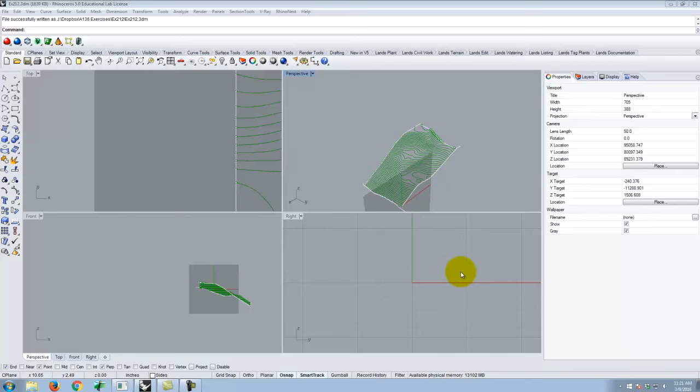Let's see here. I'm going to go to File, Geolocation. Actually, before I do that, I'm going to get rid of this person. And then I'll go to File, Geolocation, Add Location. I picked Tahoe last time. I don't know, we'll do Tahoe again. Why not? No, let's do Hawaii. Yosemite. All right, let's make this a little bit bigger so I can see a little bit more.

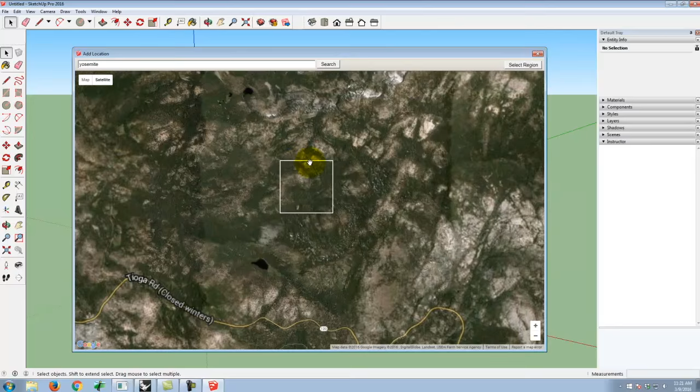We're going to avoid things like this, which are never going to really turn out nice. Let's see here. Yeah, we'll try this region, see what it looks like. I'm going to go to File, Geolocation, Show Terrain. It's a reasonable piece of terrain, not too steep. Sure, why not, we'll go with it. Yeah, let's find something a little steeper.

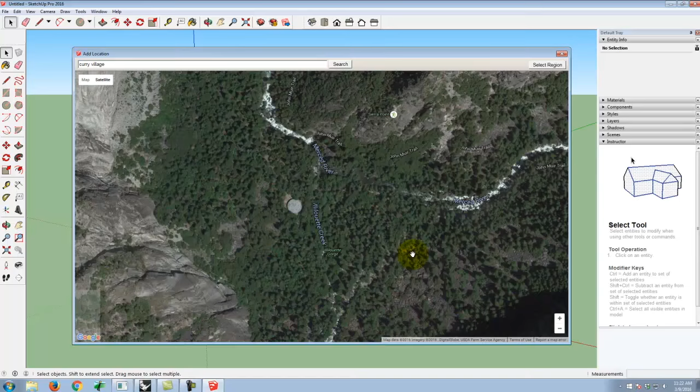Yeah, go to Curry Village. Very good. Is that in Yosemite? Yeah, that's in Yosemite. We'll pick something like in about this region. So I have to avoid all of those really steep hills, right? We can't do Half Dome, that's a bad idea. Yeah, maybe it's something like this. We'll try that.

So geolocation, show terrain, let's have a look. Okay, it's reasonable, this side I feel good about. That maybe is doable, it's a little on the steep side, but I'll go with it for right now.

Okay, so I'm going to go back to File, Save As, and make sure I pick a SketchUp 2013 or earlier file. That's what Rhino can see. And I will call this Yosemite, and I'll save it on my flash drive into today's folder.

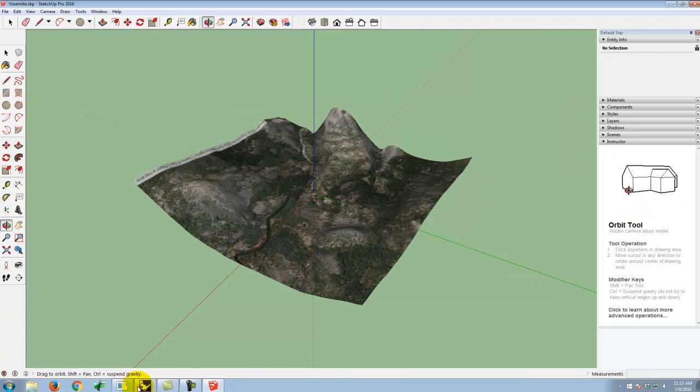Perfect, so now I have that, and I can close SketchUp and start working in Rhino. I have my file from last class already open, so I'll just open a brand new Rhino window. We'll go New, Large Object, Inches as my template. Remember, it needs to be in inches in order for the terrain to come in at the correct scale.

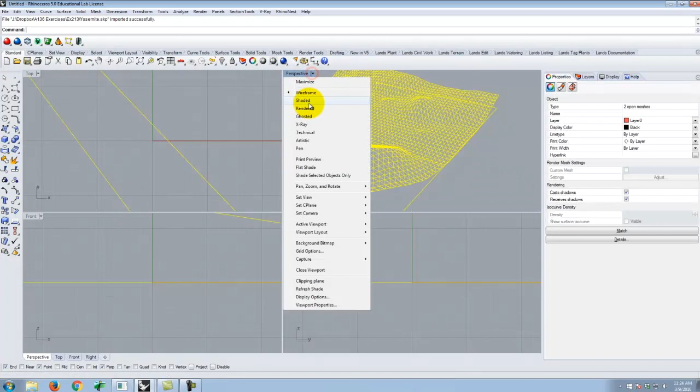Then I'll go to File, Import, and I'm going to import the Yosemite file right there. The default options here are just fine, so we'll go ahead and say OK. And if I look, there is my mesh. I'm going to go into shaded mode so we can have a better look at it.

There it is. I don't need the flat surface, so I'm going to go ahead and create a new layer. We'll call it SketchUp.

And a new sublayer, we'll call it flat plane. Now, that square was existing when I brought in the SketchUp terrain. We'll do one more for SK terrain - just trying to stay organized here. So we'll put this on this layer, and we'll put this on this layer. I could just delete it, but this way I have the ability to just turn it off.

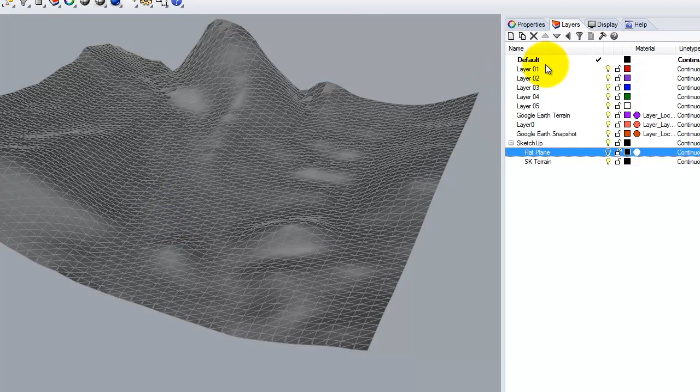OK, so there's my SketchUp mesh that came in. I need to convert it to the Nurbs object, just like I've been doing. So I'm going to do the contour in the X and the Y. We'll use a new layer called Contour X, and we'll do another layer called Contour Y.

All right, I'll start from this corner right here, making sure I'm on the Contour X layer, and I'll use the Contour command - it's also under Curve, Curve from Objects, Contour. I'm going to contour the mesh, starting with my vertex snap on in that corner, going off in space just in the X direction. And for distance, we'll try 100 feet.

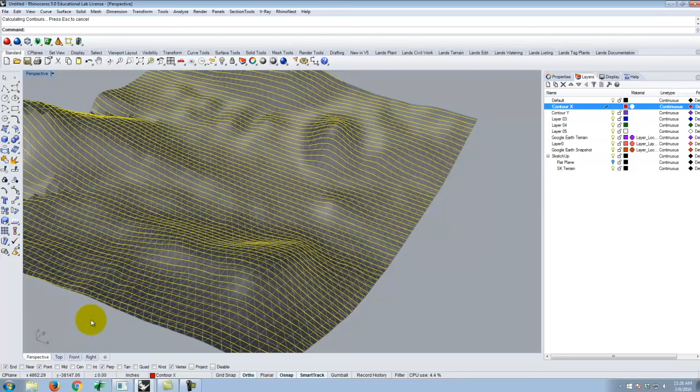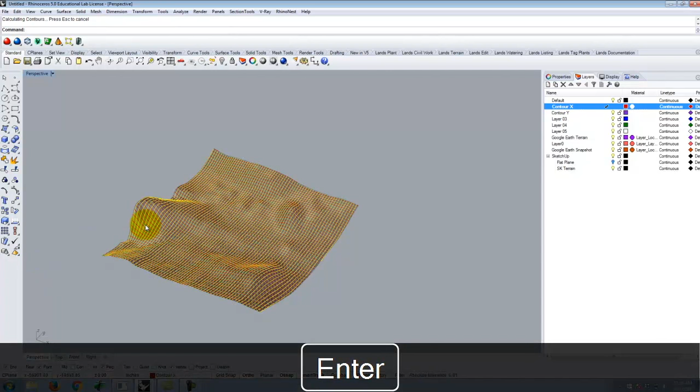Looks pretty good. Remember, I'm not going to repeat the contour with the line selected - I want to go back to the surface. So we'll repeat this now: Curve, Curve from Objects, Contour, or you can just type contour. I'm going to contour the mesh. This time it will be in the Y direction, so we'll go off here in the Y direction, and I'll go ahead and press Enter because the default value of 100 feet was still there.

So now I can turn off the SketchUp layers altogether, and I can look at my curve network in the top view. It is a grid, which is exactly what I was after. I'm going to do a little bit of trimming here. I know that I have way more than I need in terrain, so I can be rather generous with how much I'm cutting off.

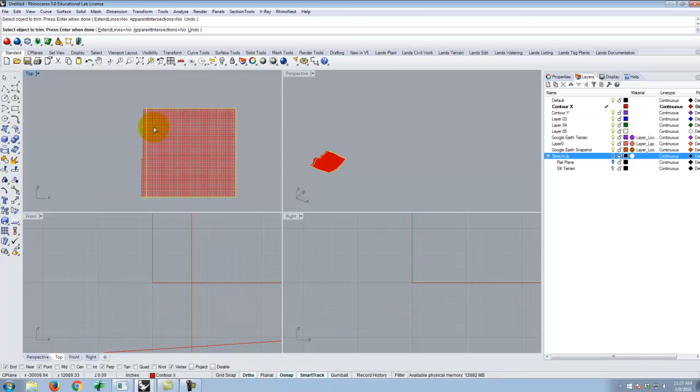And I'll do trim. Remember, if I select from the right to the left, everything that I touch will get trimmed off. That was a little too much. There we go. There we go. Always a little trickier on this edge to go from right to left. But that should do it. Perfect, so now I have my curve network.

And obviously I'm going a little faster today - this is the third repetition of this, so I feel like I have the right to go a little bit faster. So now I have the curves that are going to make up my curve network.

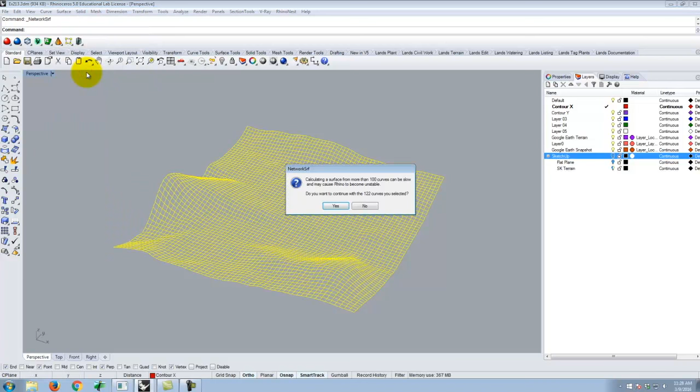And they've been established. Before I actually do the curve network, I am going to save this file, and we'll save it as exercise 213. I'll click Save, and then I'll go ahead and do the curve network of this object. So I'll select the objects, go to Surface, Curve Network. Yes, I do want to continue. This is going to take a few minutes to process here. We'll say OK.

And we'll wait - this part I can't speed up. I'll help you. I got the X and the Y down. Good.

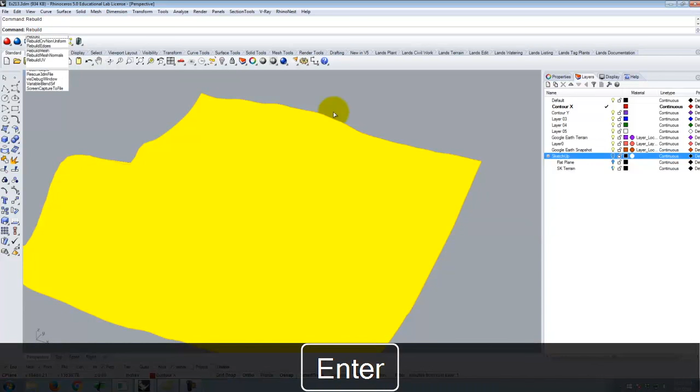Okay, so it's now finished, but the resulting surface is that super dense, slow-down-your-computer style surface. So I'm going to click and attempt to select that surface - it'll select in all yellow, that's how we know it's too dense. I'm going to type rebuild, or go up to Edit, Rebuild, and I'm going to rebuild the U and the V to be at 100 by 100. I always start at 100 by 100, and then I take a look at the resulting terrain.

And I can actually - this should have been on a different layer, sorry - change object layer. Now I can turn off the X's and Y's, and so I can have a look at how jagged this surface is. Yeah, it's still a little jagged. In this particular case, it's not too bad because of the nature of the surface itself.

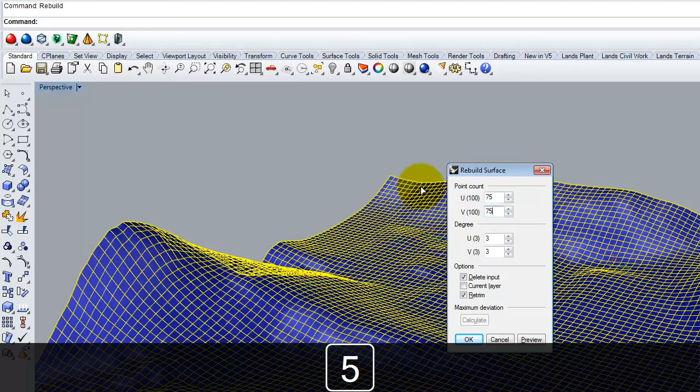But I'm going to rebuild it again at maybe 75 by 75, and again, that's a matter of your own preference - there's not a right or wrong answer for that. OK, so I've smoothed it out a little bit. Now I need to look at making this into the physical model. So I just made it through exercise 111. We can look and see.

111, 11 minutes. So we went from 40 minutes to 20 minutes last time, to 11 minutes this time. So we're speeding up, right?

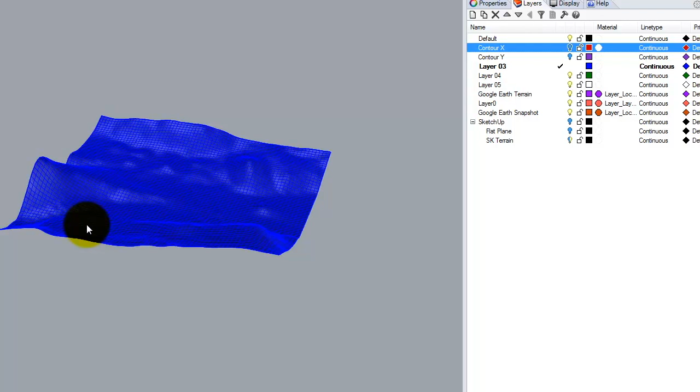Hopefully you're speeding up too. Anyway, let's continue along here and move into what we did last class as part of exercise 12. I'll slow down a bit as I do this so we can review. On the bottom of today's handout, I gave you the same chart in case you left yours behind, or you can use the one in the book as your cheat sheet.

From here, I need to establish the size of my 11 by 17 at whatever scale I'm going to build my model. In a studio context, they'd tell you to build the topo model at 1 to 200 scale or 1 to 100 scale, or some specific requirement. In this class, there isn't a specific requirement, so you can build it in any scale you want—it's up to you. Obviously, you can't pick a scale larger than the amount of surface you have.

The scale that seems to fit most people well is 1 to 200. So if I look at this sheet at 1 to 200, and come over at the 11 by 17 size at scale, that would be 3,400 feet by 2,200 feet. So I'm going to draw a rectangle at 3,400 feet, comma, 2,200 feet. And lo and behold, this seems to fit rather nicely on my site, so I'm happy.

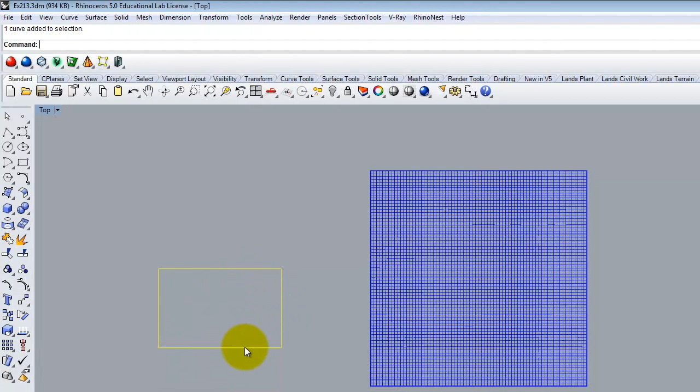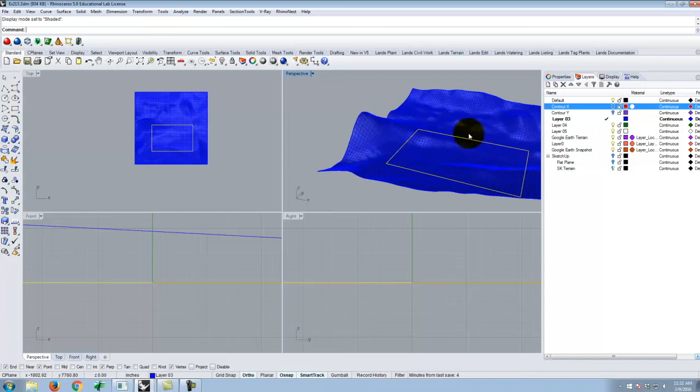At this point, I'm going to move it to line up with my site. It's a little hard to tell where it's going to show up on the particular site, so I'll switch my top view into shaded mode so I can see what I'm looking down on. I have a rather empty, vacant center of the site, but I have a few hills, so I want to make sure I include at least part of some of these hills.

Let me move it—I'm going to try to take that piece and slice through that little hill. And let's go a little further to the edge because I'll get a bit of topo on that back side. So let me move it again. I'm doing a combination of views so I can determine where this falls on the piece of topography. It's always a little hard to determine exactly where that rectangle is.

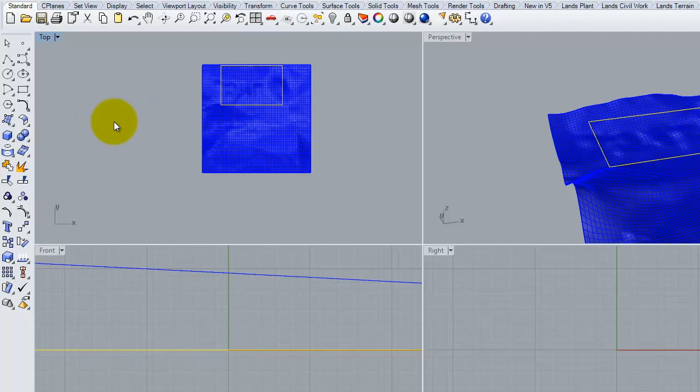But it's looking pretty good, I think I'll have good results. So I'm going to switch into the top view. Remember, to do this projection, I have to be in the top view—I can't do it in one of the side views or the perspective view. So I'm going to be in the top view with nothing selected.

I'll type project, or go to curve from objects, project. It says select curves and points to project, so I'll select that rectangle and hit enter. Then it says select surfaces or polysurfaces to project onto—there's my polysurface—and I'll hit enter again.

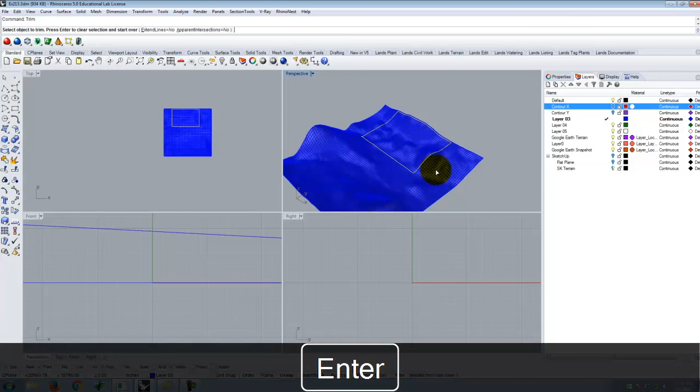So instead of having that flat rectangle from before, I now have a rectangle that represents the 11 by 17 scaled size of my piece of terrain, right there. I'll take this piece of terrain, type trim, and get rid of the outside piece of terrain, because all I'm going to be modeling is this piece of terrain.

Now that I have that little piece of terrain, it's time to start working with it at scale so I can create those jogging steps along the side of this piece of terrain. So I'm going to create contours of this surface. Maybe not—I told you this was how my day was going, right? Forewarned.

So there's my surface. I'm going to create contours in the z direction of this piece of terrain that represents my model, but I have to make sure I do it at the thickness of the material I'm going to construct the physical model out of. I told you last time that if you bought the bookstore cardboard, it's 5/32 of an inch thick. If you pick some other material, you'd have to measure it precisely for its thickness.

This same technique would work just as well if you were cutting out, say, plywood. The difference being that you wouldn't be able to cut it out with the laser cutter, you'd have to cut it by hand. But the same technique would work no matter what you're doing it with.

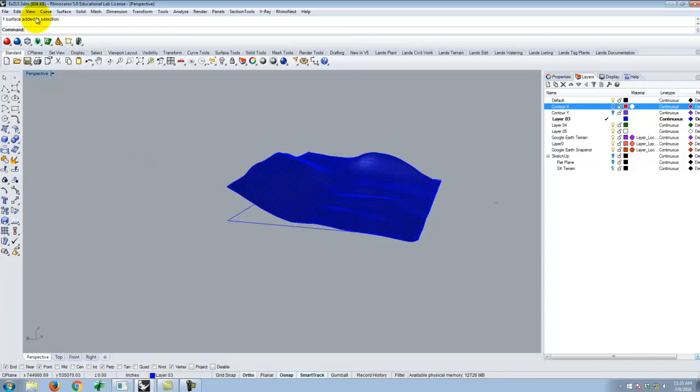So I'm going to go ahead and do my contour. I'll go up to Curve, Curve from Objects, Contour, or I can type contour. I'm going to contour this surface, and press enter when I'm done. I'm going to start it down here in the lower corner.

If I'm in the perspective view, I can only pick contours in the x and y direction. But these contours have to be in the z direction because they're stacking vertically. So I'm going to switch my view so I can see either the front or the right side. It doesn't matter whether you're working in the front or the right side, you just want to make sure you're going straight up. I can see this in all three of my views: the perspective view shows it going straight up, the front view shows it going straight up, and the right view shows it going straight up. That's what I want, and I'll go ahead and click.

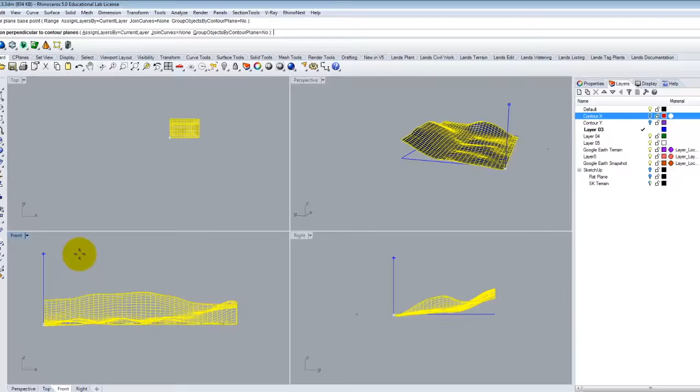At my scale, 1 to 200, I'll come over to the value for 5/32 of an inch, and it's 31.250 inches. So my distance between contours will be 31.250 inches, and I'll go ahead and hit enter.

If I look at this in perspective now, I have all of these contours that have been drawn for me. Actually, this is a pretty good one because there's some ups and some downs that we're going to have to solve, so it'll be good for the phase of what we're doing.

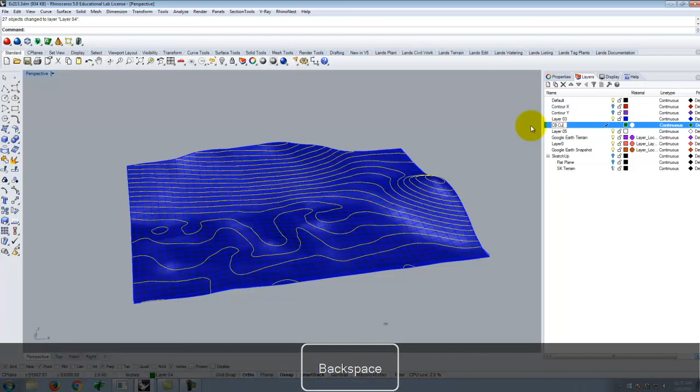Let me go ahead and change these objects onto a new layer. We'll make layer 4 here my cardboard cut, cardboard topo lines, something like that, and we'll turn off the surface itself. I do want to be able to reference the surface because I'm going to have to figure out when a particular step goes up and when a particular step goes down in this lower, flatter part of this setup here.

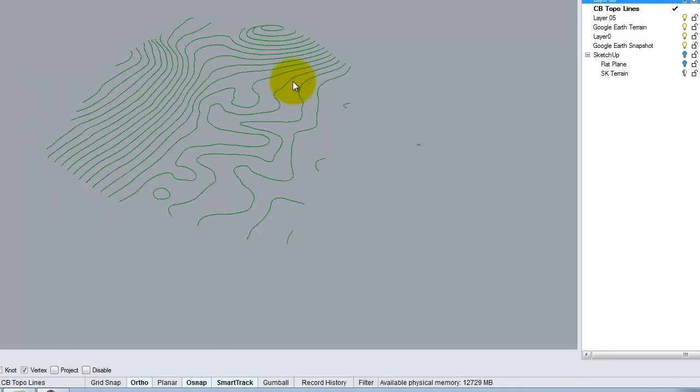So now that I have that, I'm going to start to work on the steps on the side. Like I said last class, I really like changing the C-plane and working in a different C-plane because I think that's the easiest way of dealing with it, and from a skill set long term, you'll benefit from doing it this way. So for today, I'm only going to demonstrate the C-plane method. If you feel more comfortable with the other method, by assigning the points and then rotating them, there's nothing wrong with it—you get to the same place, it's just a matter of comfort.

Right now, my C-plane is in world top, and we can see my little grid there representing my world top C-plane. I'm going to go ahead and make that grid a little bit bigger, just so you guys can see it on the screen better. I'll go to Tools, Options, select Grid, and maybe make it 2000, and go ahead and say OK.

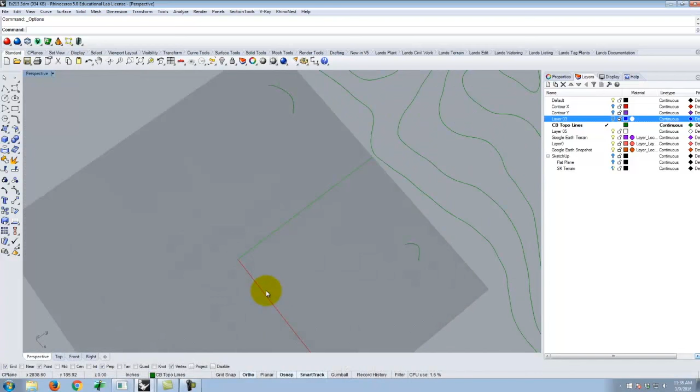So at world top, there it is, flat on the ground. I'm going to reset this C-plane so that it's going along the side here. I'll click on this little triangle, and go to Set C-plane, 3 points. I'll start by clicking on the first point, or maybe the second point, along the side of this edge, and run the X direction out along this axis—again, not snapping to anything, just straight out. I have to set the Z-axis so it's going straight up, and the only way I'm going to be able to do that is to look at all my views at once, and there it is in the front, the right, and the perspective view going straight up. So I'll go ahead and click.

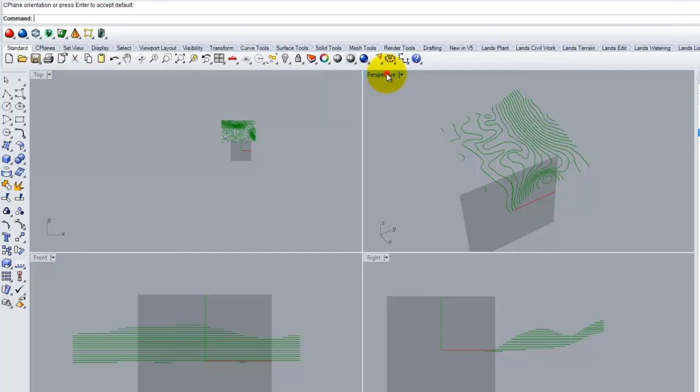Now my grid and my workspace essentially is aligned with this edge of my contours, which is exactly what I was trying to do, so that anything I draw, even if I were to draw a line over here, it's going to be in plane with this edge—I can't draw anything flat. So I've switched the drawing plane to be vertical, which is the idea. Let's go ahead and do some steps, and I'll start working on layer 5, and let's rename layer 5 to be steps.

If I can't type, what else is new?

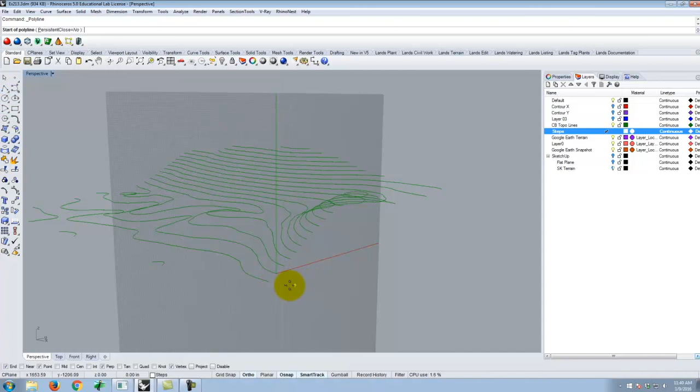Steps. So that's the current layer, and I'll go ahead and start drawing in my steps. I'll start at the lowest point here and use my snaps. I'll make sure perpendicular is on so I can use my smart tracking with perpendicular, and we'll work our way up this side.

Of my contours. Some of the technique here is in what angle you view this. So here I am, and you can see that this last contour, this circle, doesn't intersect the side that I cut. This contour here will actually come straight across and meet. If we follow this contour around, it ends up being the same level, so they should be at the same point.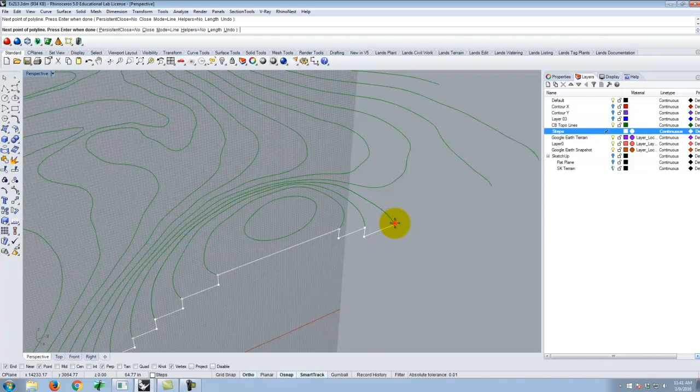And then I'll start going down in the opposite direction, like that. Now if I look here, this contour is at the same level as this contour, but I've already gone straight across here. So this particular piece actually has to go down, over, and then back up. But I know my contour interval is 31.250 feet, so I'll type in that as a value and have it go straight down.

So there it is, going straight down. I'll come straight across and then back up, and then go back up to this last point right here using my smart tracking there. I'm going to end by just extending this line off into space.

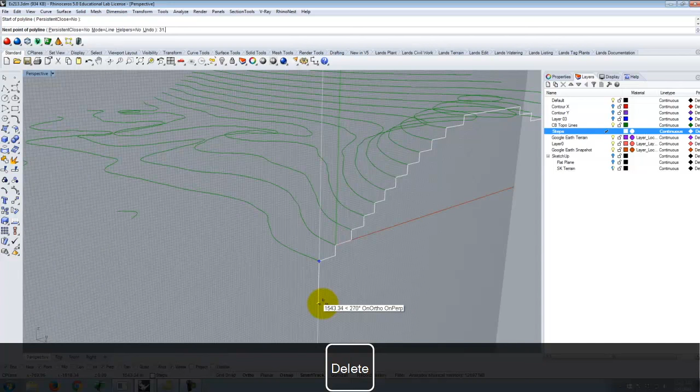So over the corner, it's possible at this front location that I also need to go down 31.250 feet. And I'll run this line off into space. Ultimately, I'm going to end up intersecting that line as we go forward.

So now it's time to move my C-plane to one of the other sides and work my way up one of those sides. I'll work my way around and start now at this point. It's much harder to reset the C-plane using 3 points here without going back to world top first. So I'll go back to set C-plane, world top, to kind of reset back to the defaults. Then I'll go to set C-plane, 3 points.

We'll snap to that point, and I'm going to go off in space this direction. Again, I have to go straight up in the Z, so I'll do that using my front and or my right view. Now, once again, that grid is shifted 90 degrees from where it was before.

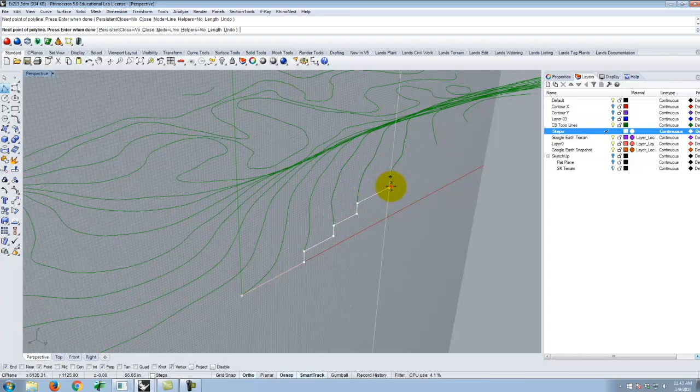So I'll start at this point and draw my way up the steps. So here I am at the top of that hill. Once again, I'll go straight across.

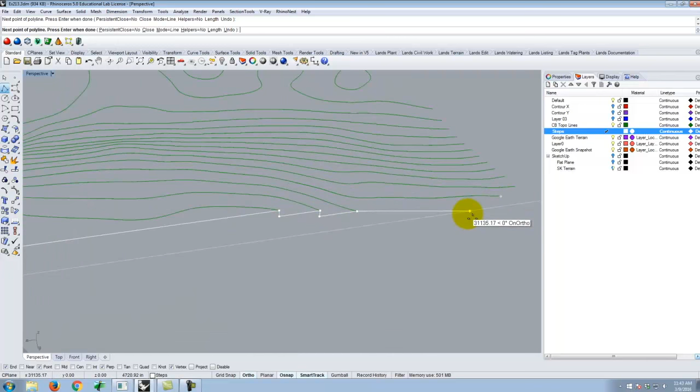Now I have to go back down to catch the next set of terrain here, so we'll go down and over, down and over. And when I get to this last point on the side, I need to go down 31.250 feet and then run it off kind of out into space there.

I'll come back to this first point and do the same thing, so it's going to go down 31.250 feet. But as I come across here, if I run this off into space like that, we can see that that corner—we didn't emphasize corners last class—but those two lines intersect at the same level, which is exactly what I want to have happen.

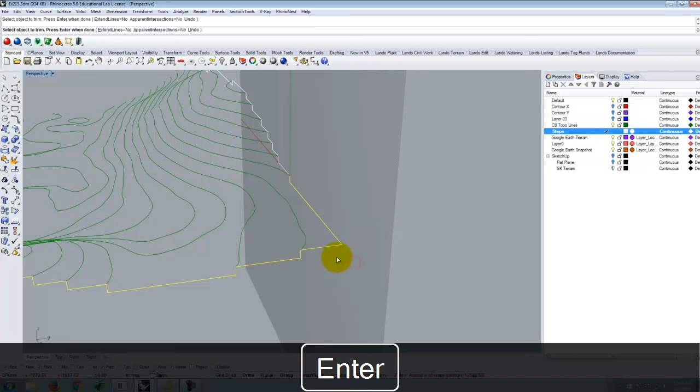So now that those two intersect, I can use a trim command and get rid of that, and they meet nicely at a point. If you try to use the trim command and it won't trim, they don't meet up at the same level, which is a problem. So we want to make sure that they end up at the same level.

So I've worked my way around that corner. Now I need to work my way down this side. So once again, I'll reset my C-plane to world top, and then I'll go back and say set C-plane, 3 points.

I'll start at the first point along this side, and we're going to go in that direction and then straight up. There it is, straight up. And I now have a C-plane at 90 degrees to where I just was. We'll work our way down this side—I'll start at this first point and start snapping my way down the side.

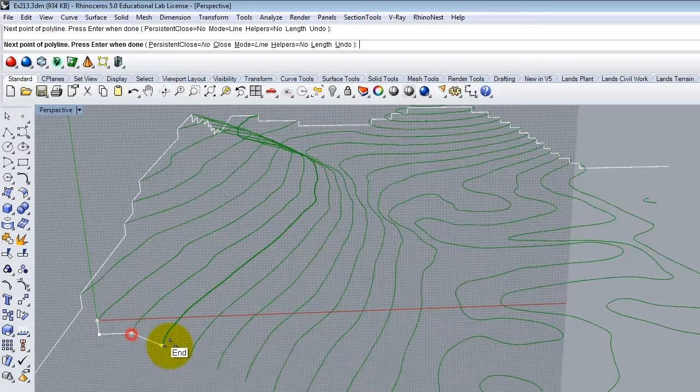The good news is this is not the most complicated piece of terrain, so you don't have to sit here and watch me do super steep steps.

Okay, so here I am, and it looks like there's a little hole here, but I'm still going to have to make my next step down. So we'll go there, and then we'll keep going. So while it might have looked like those two were on the same level, they in fact were not.

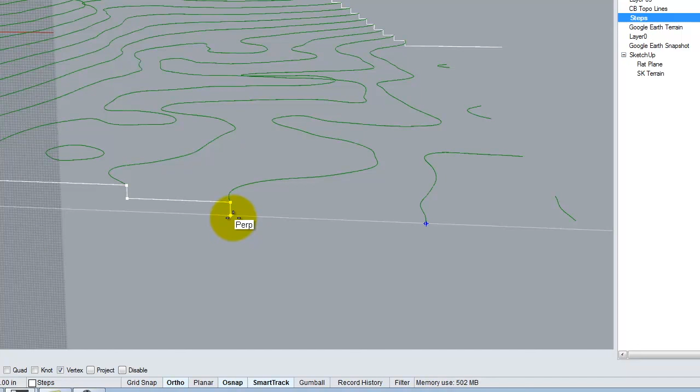And so I get to that last point. I'm going to go down 31.250 feet, and then off into space that direction. And I'll also come back to this level and go off that way. And when I do that, we can see that once again those two intersect. So it's time to do a trim, and trim off those two pieces as well.

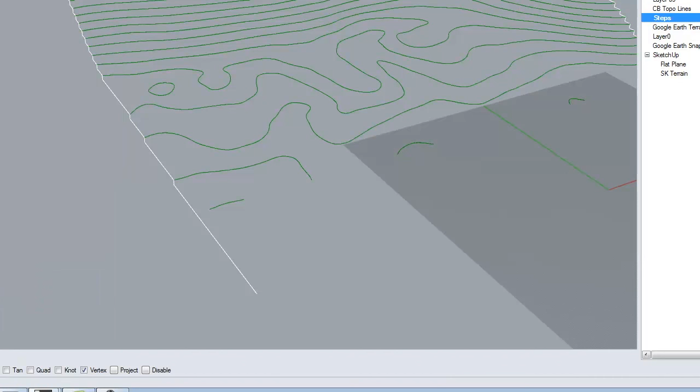So I've worked my way on 3 sides. We just have the last side here to go. I'm going to go to my Set C-plane world top, and then I'll go back to Set C-plane 3 points. We'll go in this direction and the Z-axis. There's the Z-axis.

All right, so now this one starts to get a little bit tricky because I've got lots of ups and downs depending on where I am along this side. It's a very flat side, so there's going to be some ups and some downs.

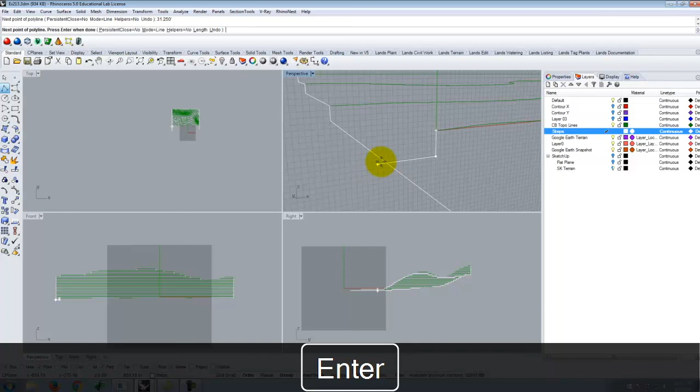So we can tell initially that this step goes down, but this line here is at the same level as that one. So I'm going to start at this point, and I'm actually going to go down 31.250 feet, and then I can come across, and we can see that those two intersect. So I can do my trim.

So now if I were to continue, I'd have to go straight across to this point, and then I'd have to go down again. So I could type in 31.250, or I could use that snap, and I'll come across until I hit this point. There, and I'll go up.

Now this is going to go straight across until it hits this curve. And then I'll have to go down again 31.250 feet, across until I hit that curve, and then back up.

So you can see that this line's very different. It's not steps, it's ups and downs because it's relatively flat as I go across. So there I am, relatively flat, straight across to there. Once again, I'll go down 31.250 feet. I'll go straight across to there, back up, and I'll continue.

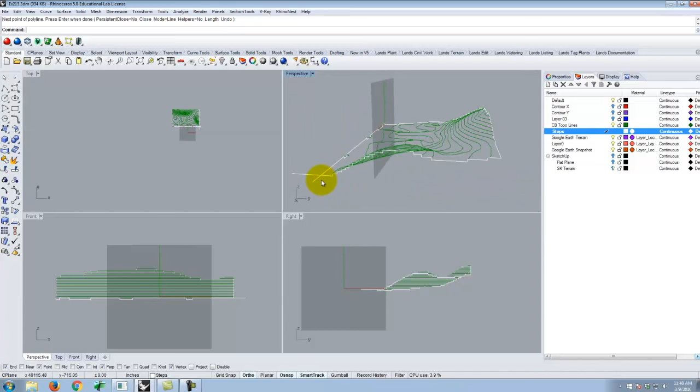Now if I did this correctly, those two lines should intersect at this corner, which they do. So I'll type trim, and I'll select these two, enter, and I'll delete those. So I was able to draw across this front, but this obviously looks very different than the stepping sides of the other side. So this was actually a good example to pick in terms of figuring it out.

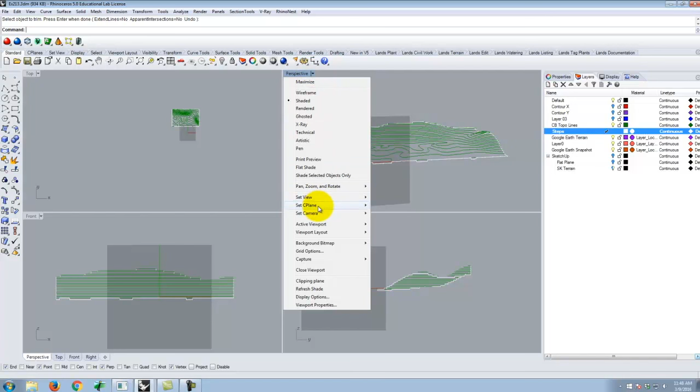So I'll go back to my Set C-plane world top. And what I'm going to do now is make sure that the sides are joined. So that piece is separate from this piece. Now I have everything on this side selected, so I'll type join. And I have one joined curve for that side.

Let's look at this side. Pretty good except for that. I'll type join. Now those are joined. Let's look here. I need to join to there. Perfect.

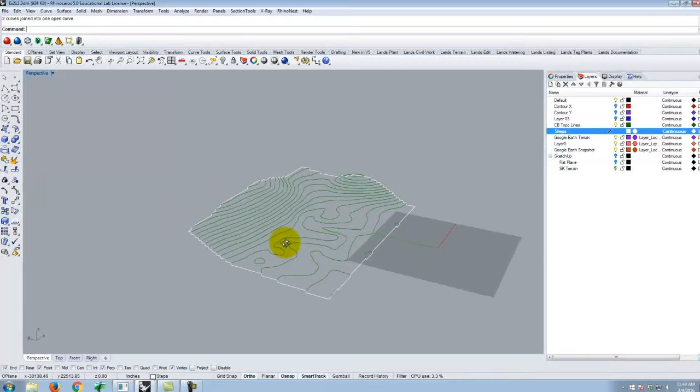And now we'll look at the back side, and I need to join there as well. It's also available under Edit, Join. Okay, so now I have each of the sides established for me. I could actually turn off the topo lines, and we could see just the sides for a second. And they're reasonably well set up, and I'm confident that the corners meet up nicely, which is how I want.

So now what I need to do is draw some vertical lines from each of the corners down such that they're below wherever my lowest point is. And this will represent one of the sides of the model. Let me run over to my office really fast right here and grab the physical model so that I can point it out to you.

Okay, so as I look at this physical model, there's always going to be a low point somewhere on the model. And if I'm going to cut out a side, I want to make sure that this low point isn't right on the bottom. I want to have a little bit of space below it, just for stability. And so this can kind of help the overall model if you have an inch or so of space below.

So it doesn't matter what the value is that you choose to put here. The point is that I'm going to start in this corner, and I'm going to go down some value that seems like a reasonable distance. So something like that seems reasonable to me. I didn't even measure it.

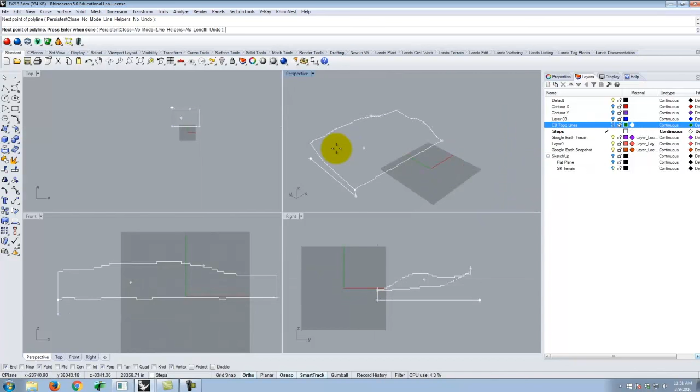But now I can come across, out into space, something like that. And I'm starting to establish what one side of this would look like. So I'll go ahead and come down to there. I used my perpendicular snap. And let me go ahead and trim this off. Oops.

Trim. There. And then I'm going to join. So now I have the first side. Let's try that one more time. So I have this side and that top, and that's one piece.

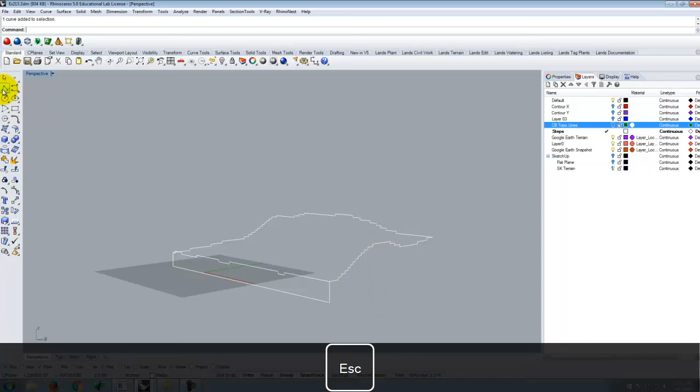I'm going to repeat this for each of the pieces. So I'll go down again with a polyline to here, there, and then off into space, and then straight down, using a perpendicular snap. I'm not adjusting the C-plane anymore, I'm just using my snaps.

So I'll go to trim, and I'll get rid of this. And then I'm going to take this, and I'll join that together. I could actually take it one step further and take that piece and join it to this top piece. So I now have a whole side.

Likewise, I could take this piece and join those. And so I have this side, this side. I'll keep working my way around. Obviously, the bottom has to maintain the same, flat, same level as I work my way around. So let's go from this corner straight down to perpendicular.

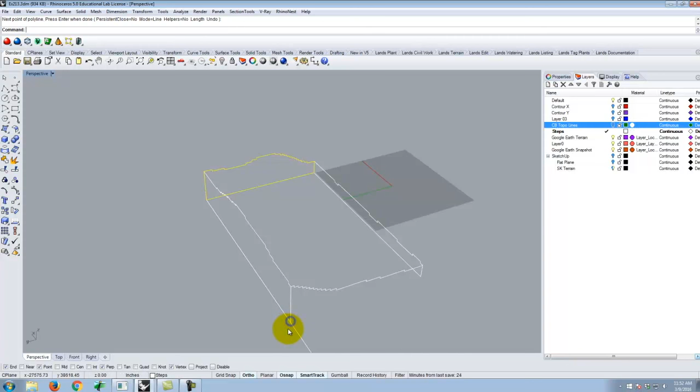Trim. There. Join. And let's join it to this as well. Perfect, so I have that. And then I have this one last piece.

Notice that I'm not just drawing a line across at the bottom. I'm still creating each one of these legs that go down, over, back up. I'll take that and this, and I'll join those together. So essentially, I'm mapping out where the extents of this particular surface is, this particular stepping side of my topo would be.

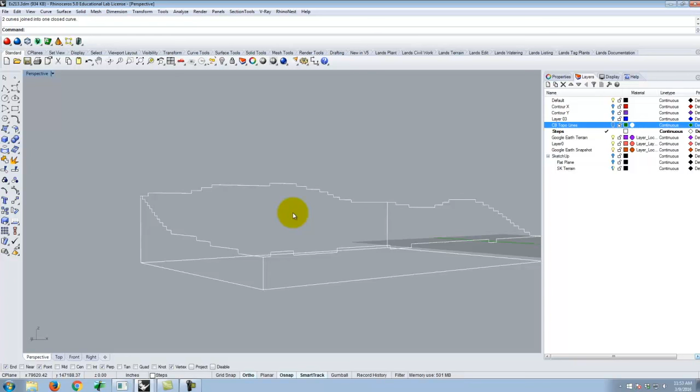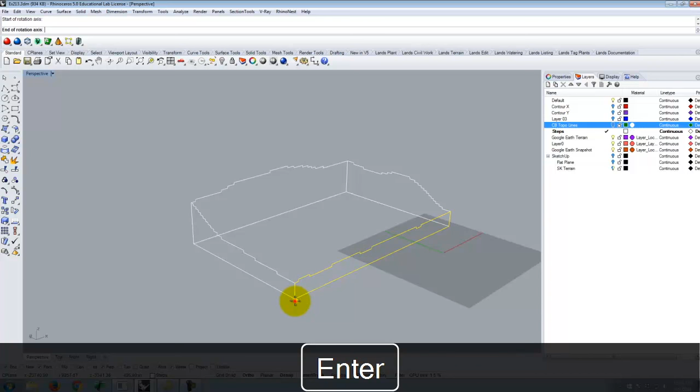So now I need those sides to fold flat. And it doesn't matter whether you fold them in or whether you fold them out, you just have to fold them all in the same direction. So I'm going to use Rotate 3D, Transform, Rotate 3D, and I'm going to fold each of these sides out independently. My axis of rotation will always be along the bottom of each side. And so I'll fold that flat.

This is kind of like unfolding a box. I'll do the same thing with this side, axis of rotation right along the bottom, and we'll fold that flat. Same thing here, axis of rotation along the bottom, and we'll fold that flat. And we'll get to our last point here, and I'll fold that flat.

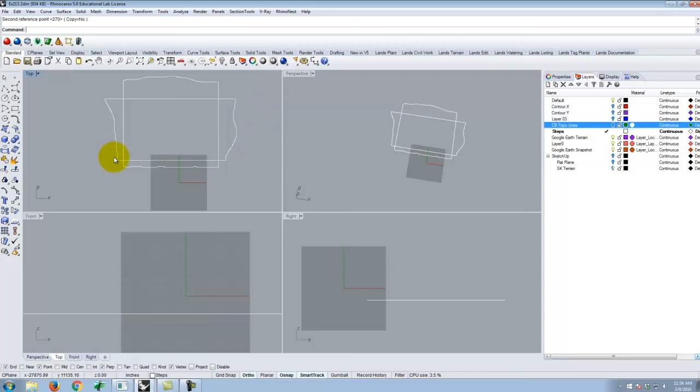So now, if I were to look at this in the top view, I have the outlines of each of the sides that I need with all the steps that I need. There's only one tricky part to this, and that is that when I go to glue this together, I have to compensate for the fact that there is thickness of these stepping sides. So on two opposing sides, and it doesn't matter whether it's the short pieces or the long pieces, I have to subtract off whatever the thickness of the cardboard is.

Well, I know the thickness of the cardboard is 31.25 feet because that's what I used as all my contour intervals. You could do this after you scaled it down and went to go cut it, and do it at 5/32 instead of at 31.25 feet. It doesn't really matter, but I'm going to do it here.

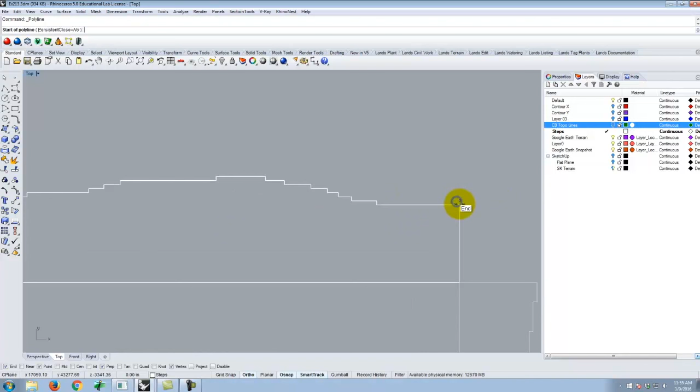And what I'll do is I'll start with a line. I'm going to come over by 31.25 feet to right there. I'll do the same thing, 31.25 feet right there.

And I'll use those two lines that I just created, there and there, as trims. And I'll get rid of that piece and that piece. And then I'll join these back together.

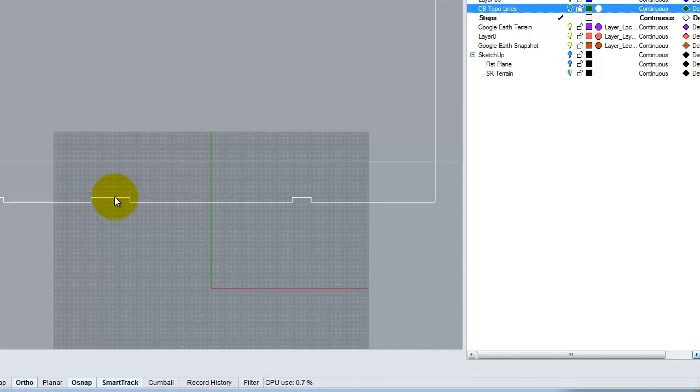Yeah, they're all joined. Okay, so you can now see that there's a gap. Instead of these meeting at the corner, there's a gap. That's to compensate for the thickness of the material. Sometimes you'll forget about it and you won't do it. Remember that when you're actually building the model, you'll have a knife in your hand, and if you need to take off 5/32 of an inch, you can do it by hand. I know it's a touchy subject, but it's possible to do it by hand.

So let me go ahead and do that on the opposite side. Remember, they have to be the opposite side. So I did it on the long side, I'll do it again on this long side. I'm going to go over 31.25 feet.

And right over here at 31.250 feet, we'll trim using these two points, that and that. I'm going to select everything and then join.

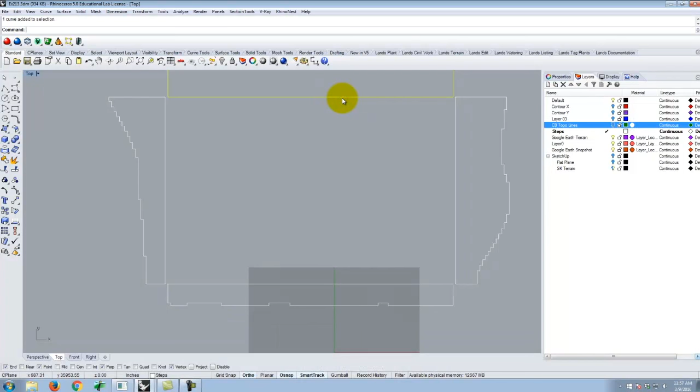Now I have this piece and this piece, both at the correct length. So now I have those pieces, which is great. I have all four sides. Now I need the contours themselves.

Let's go ahead and turn back on those topo lines that are there. The problem here is that the topo lines are in 3 dimensions right now, and so I need those to get down to being flat.

So what I'm going to do is project those onto a surface. And I can, in the interest of not distracting things, let me move these. I'm done with the sides altogether, so let me go ahead and just move these away, up here for later.

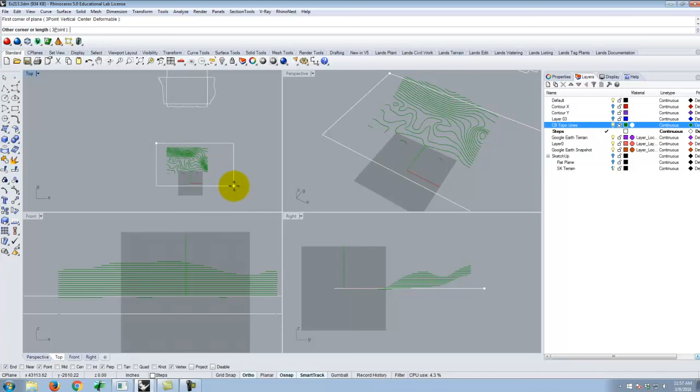Now what I'll do is create a surface, just a rectangle corner-to-corner plane, larger than all of my contours. And once again, in the top view, I'll do a project to get all of these contours flat. We did this back in exercise 211 and then exported to CAD, which is kind of the precursor to the direction we're going.

So I'll go up to curve from objects, project, or I'll go ahead and type project. It's going to say select curves to project. It'll be these curves, and I want to project them onto this surface. So I can go ahead and press enter there.

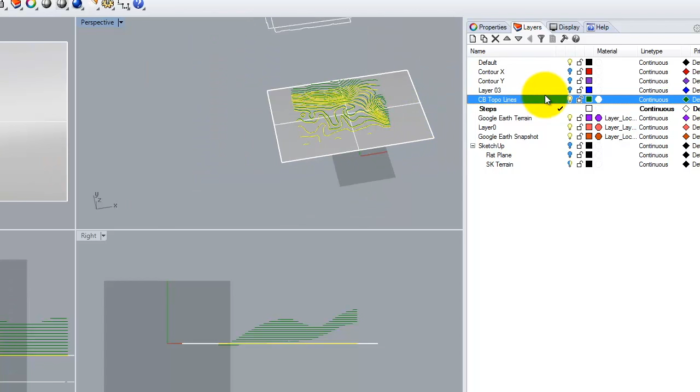And I now have a flat set of curves on that particular surface. So that I don't get confused, I'm going to turn back off my topo lines, and now I can get rid of the surface. Now I have just the set of actual contours.

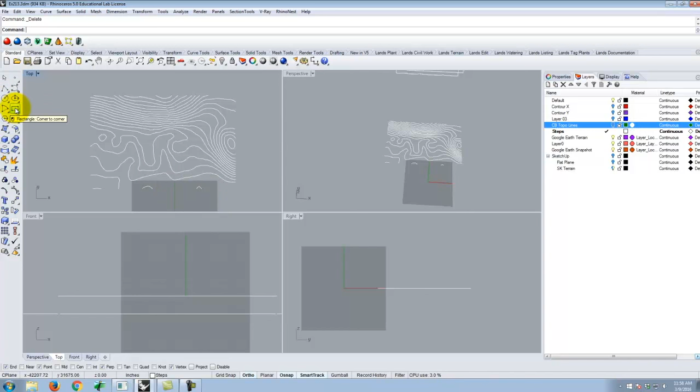I'm also going to need a rectangle that goes around all of these so that I have an outside border when I go to cut it out. So I'll go ahead and add a rectangle. This is not a plane, it's just a regular rectangle that goes all the way to the edges.

Like that. So in the top view, I now have the contours and I have a rectangle that goes all the way around, kind of binding them.

So one of the ways that this whole thing works as a strategy is that we actually stack up the cardboard. So you see that it's hollow on the inside and hollow on the outside. If I were to just cut this out, I'd have individual pieces of cardboard, but I wouldn't have any surfaces to glue them on.

Instead, I'm going to make 2 copies of the same contours. So I'll take this and I'll copy. Transform, copy, and I'll create a second copy of the exact same topos.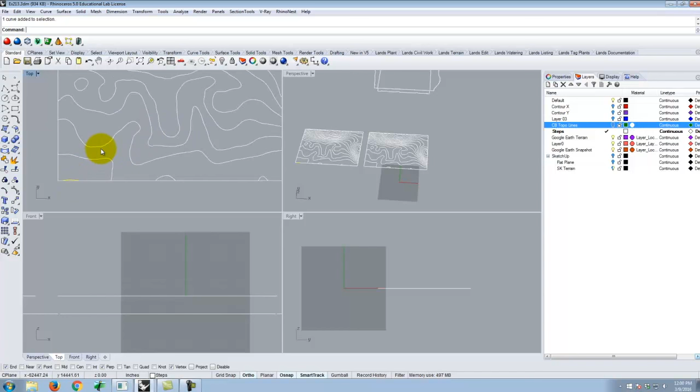Now what I'm going to do is I'll start with the first one, and I'll start at the very bottom-most edge, and I'm going to alternate as I go up and select. So let's say I have this, I'll go to the next contour there. Now this gets it. Well, let me start at the top.

Let me start here, this is a little easier. We'll start there, I'll skip to the next contour, I'll skip to the next contour, etc., and I'll work my way down the model like this.

Now, in this particular example, it gets a little tricky because I have some ups and downs in the lower flats. So I'm going to have to pay attention to what's happening, and I may have to reference these side steps to make sure that I'm getting the correct definition here. So if I skip, I would include this one, and I would include this one.

Now, I missed a few in this hill, so we have to go back up the hill. It's that one and that one. And then I have to look carefully at the bottom so that I can make sure, remember this was virtually flat, and so I have to make sure that I'm selecting all the curves that are on the same edge.

So this particular curve here would be the curve that ends right there. That would be at the same level as this curve. So I'm looking in this view, let me flip this. No, it's probably easiest to see it upside down. That curve is right there, it meets at that point. This curve meets at that point.

That curve meets it over here, right? So I'm going to select this one as well. It takes a little bit of mental game playing to see which direction. If you have a surface like this that doesn't go back on itself, it's a lot easier to figure out which curves to select. But I can help you through it if you're struggling a little bit.

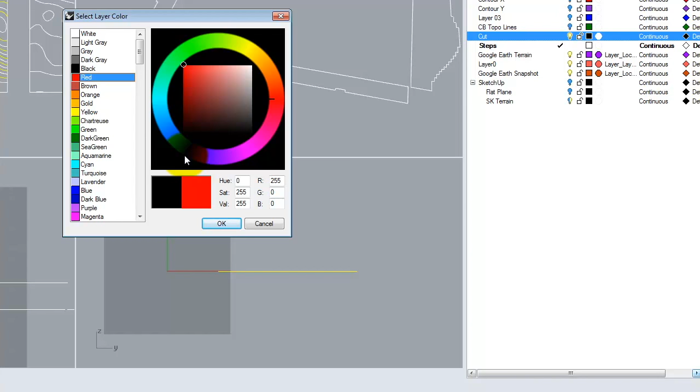OK, so now I'm going to create a new set of layers. We'll do a new layer, and I'm going to call this the cut layer. I'm going to change these objects to be on that cut layer, and change the cut layer to have a color of red. This is important because we need this for the laser cutter—it's going to recognize this as an actual set of lines that we can cut.

This one? Thank you. So let me change it to be on the cut layer.

And actually, let me go ahead and create a layer called laser cut. We'll put the cut layer underneath the laser cut layer, and then add another layer underneath for engrave. So the laser cutter has a couple different functions.

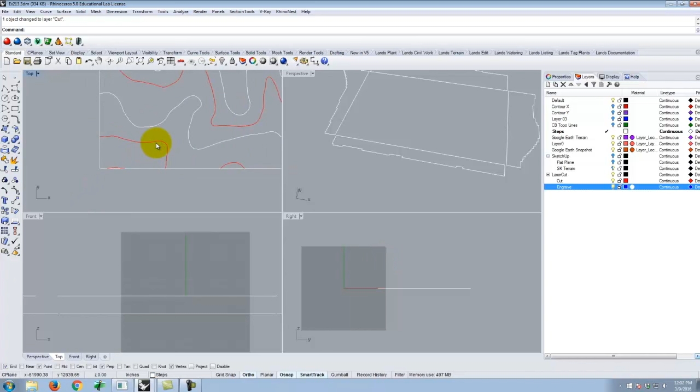I'm guessing a lot of you have already cut things because you've been through 121 and have experienced this before, but it doesn't hurt to refresh and remind you. The laser cutter: any line that is pure red will get cut, and any line that is pure blue will get engraved.

So I have all of the red lines established here, but I'd like all the lines that are currently white to also be selected, and I'm going to make those blue. That will leave me a little tiny engrave line to reference when I'm gluing my model together.

So let me go ahead and change object layer. There we go. And so now I have the blue lines and the red lines, and the border that goes all the way around should be cut out, so we'll go ahead and change that as well. So this side is ready to be cut.

When I move to the second sheet—remember I said I needed two so I had something to glue on—I have to do the opposite. So if I started with red here, I'm going to start with blue on this set. The first ones I go through will all be blue. So I'll hold down Shift and select every other line.

And there. OK, so I've selected every other line. These are all going to go on the engrave layer, so I'll change object layer.

There they are, and the opposite are going to end up on the red layer. So we'll do this and work our way up here. All right, I've got them all—we're going to put those on the cut layer.

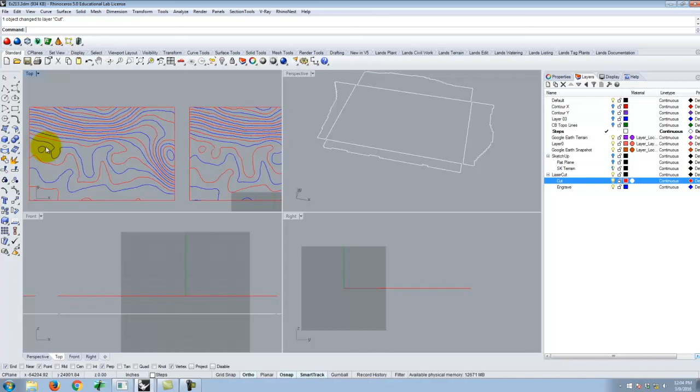What will happen once you cut it out is you have two versions of these topo lines, and you'll take the first one from one pile and the second one from the next pile—it's kind of like shuffling a deck of cards. You take one from each, and they'll glue together and stack up to make a really nice final model.

Now, if your terrain is very steep and you're trying to accommodate a really steep piece of terrain, the thicknesses between these might start to get too small. So you maybe have a 1/16 of an inch—well, if you engrave in between a 1/16 of an inch, that would be a 32nd of an inch, and the ability for you to actually glue one piece to the next is going to be very challenging.

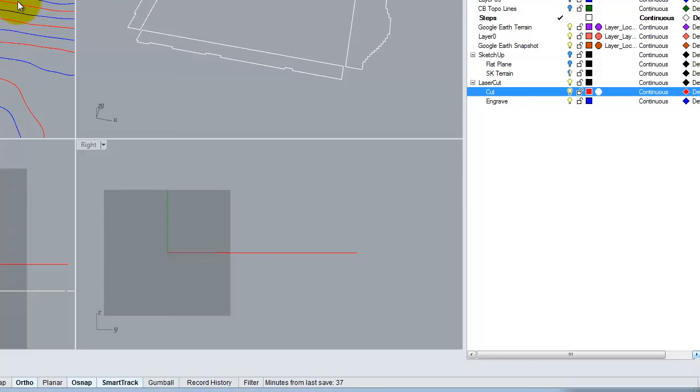So in the scope of this class, probably the easiest solution is to pick a piece of terrain that's not so steep. But let's say you actually had a project that required a topo, and it was really steep—if that was the case, you could do more than two sheets and thicken up each of the pieces.

So if I did, say, 4 sheets and 4 versions of the cut, I'd have a red line, a blue line to engrave, and then I'd skip 2 or 3 contours, and depending on how many versions I had, the glue pieces would be larger as they stacked up.

You can get them fairly close together, but if it starts to get less than 1/8 of an inch, you're going to have a really hard time gluing them together.

Okay, so I have these 2 versions ready to cut out. I have the sides, those need to go on a layer to cut out, so I'll change their layer to be on a cutout layer. The last piece of the puzzle is that I really need to get these files ready to go cut.

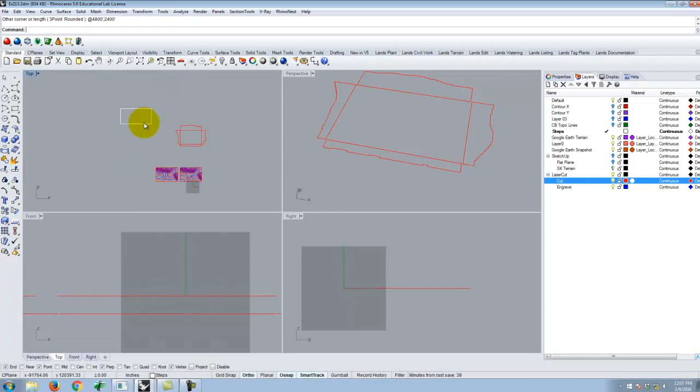If you're going to cut on our particular laser cutters, the size of the bed is 12 inches by 24 inches. So I'm going to draw a rectangle, and that rectangle should be 12 by 24 inches. At this scale, that would be 4,800 feet by 2,400 feet. So I can say 4,800 feet, 2,400 feet, and that represents the size of the laser cutter bed, the maximum size piece of cardboard that I can cut.

So I'm going to take as many of these 12 by 24 sheets as I need. Let me copy a few more. I know I'm at least going to need 3, I'll probably need 4.

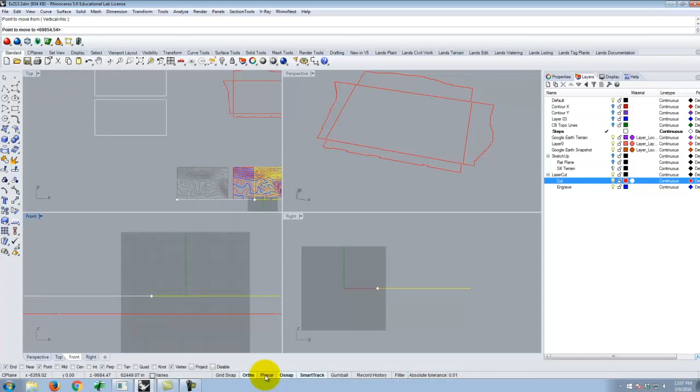And then I'm going to arrange these objects onto these sheets. So we can start with this first piece, and I'll move it on. A lot of times turning off ortho is a good idea here, and potentially disabling your snaps is a good idea too.

I want to make sure that my border isn't right on the 12 by 24 — the laser cutter doesn't cut all the way to the edge, it's a little bit less, it has margins. So I just want to make sure I have it placed kind of nicely in my sheet. There's my first one. Here's my second one, I'll move this one as well.

I'll take this piece and move it there. Take this piece and move it. Looks like I'll be able to get away with 3 sheets, I think. And we can take this piece and move it there. Now notice I did not flip any of the pieces.

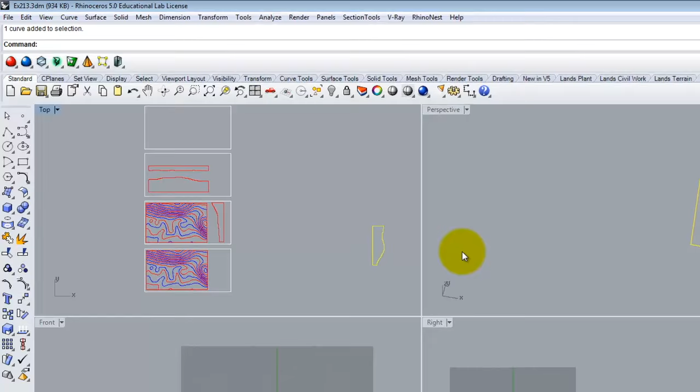You're okay to rotate them, you just don't want to flip them, because you want the direction of the cardboard to stay consistent. So I'll move this one as well, and put it right there. So it turns out I didn't need this last one, I only needed 3 sheets. So I've laid those out, I have them ready to cut.

Now the very last piece of this puzzle, and actually you don't have to do it as the last step, but these are still in full scale. I could export these as an AutoCAD file, and when I went to actually do the laser cutting, I could apply the scale. To me, it's easier if it's just in the scale that you finally want to cut it in. So I'm going to take this overall set of pieces and do a regular scale to it.

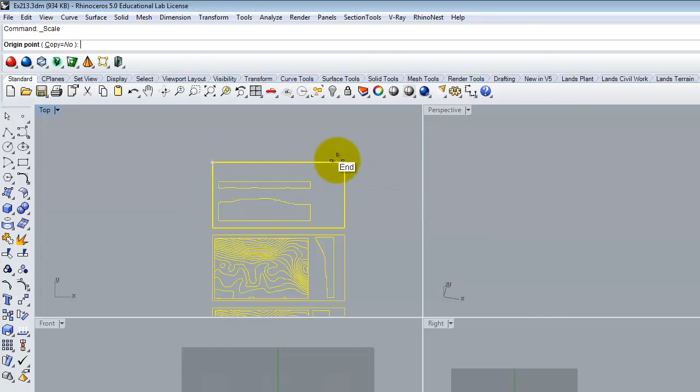So I'll go to Transform, Scale - it's going to be scale 3D, or just type scale. Let me turn on my snaps here. I know that this edge from there to there is 24 inches, so I'll do a scale from here to here and type in the new value, which is 24 inches, and hit enter. Now it gets really, really tiny because we just went from 4,800 feet to 24 inches.

So I'm going to do zoom, then S for selected, because it's still selected, and now I can see it. Okay, so from here it's just a matter of going to File, Export Selected, and I'm going to save this not as a Rhino file, but as an AutoCAD DWG, an AutoCAD drawing file. I'm going to make sure it goes into my Exercise 213 folder, and I'll call this 213.

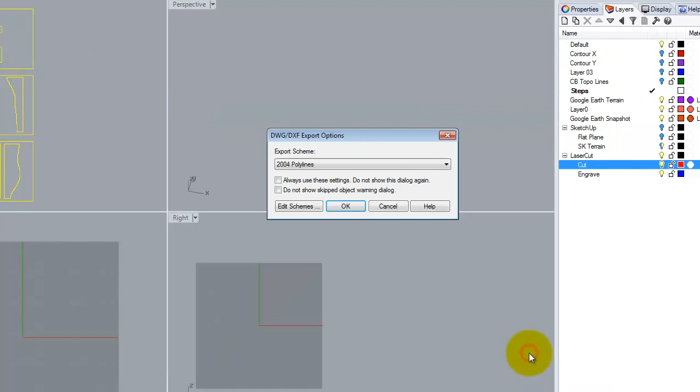I'll go ahead and click on Save. The export, the DWG 2004 polylines would be the best option for you. I'll go ahead and say OK.

And I've now written my AutoCAD file to be able to go next door and laser cut. Part of the reason I've given you so much emphasis in class is so that you can have this file ready. Today, I'm asking you to post this DWG file to the course website.

So this is what you have to have as proof of working today. If you don't finish it, it's okay, but you have to post the DWG file. There isn't going to be some nice featured image or anything, it's just this DWG file.

You do, however, have to make a separate post as part of your assignment 202. So if you feel like you're all ready to go and this is your digital file to go cut for assignment 202, make a separate post for it so that I can give you credit for that digital file. If you have no clue what I'm talking about, go back and read assignment 202, because this is one of the requirements of it.

Because not only are you going to hand me this after spring break, or a week after spring break, before that there's some due date, I don't remember what day it is, you have to post the AutoCAD file to the course website. So it's a two-part thing. It's April 4th, you have to do it by April 4th.

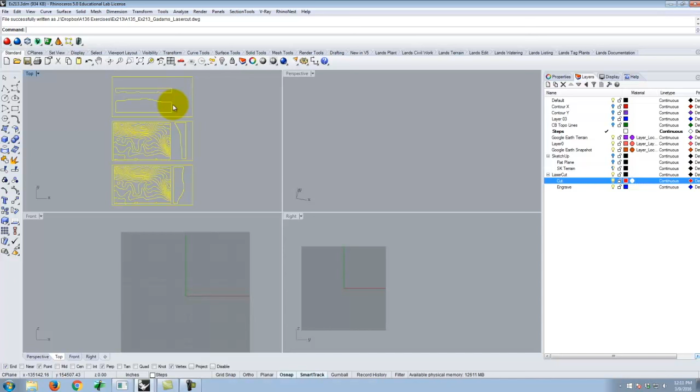So I have this as an AutoCAD file. There's one last thing that you have to do in AutoCAD that you can't do in Rhino. The lab techs can help you do this over there, but if you feel comfortable doing it, I want to at least show it to you. If I go and I open that file...

Since it's an AutoCAD file, if I double-click on it, it will open in AutoCAD. This comes up because it was written by Rhino, not AutoCAD itself, and you just say Continue.

And we see there's my file already set up for me to go ahead and cut in AutoCAD. I have this all ready, but I need to go to this button for Layer Properties, where we see my cut and my engrave layer. They're red and blue, the colors are correct, but the line weight is not correct.

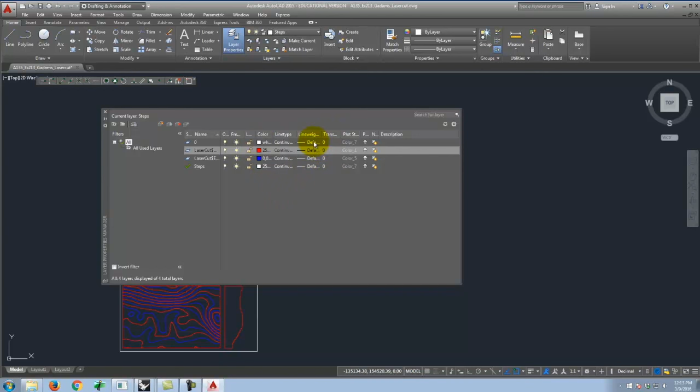For the laser cutter to see this and cut it correctly, we have to switch from default to 0.00. So on any and every layer that's available here—you may have other layers that come in, you may not—I'm going to go ahead and click on it and set line weight to 0.00, on each one. When that's done, I can just save my file, close AutoCAD, and walk over to the laser cutter and bring it on my flash drive, and that'll be ready to cut.

There are lab technicians that will work, there's usually a sign-up sheet on the door. They can help you if you've never cut a file over there before. You'll have to buy your own cardboard and provide your own glue to glue this together. I don't think either one of those is particularly challenging.

It would be helpful if you also had an X-Acto blade of some kind, because you have to do a few modifications to the actual pieces once you start gluing it together. So I have this file ready, I will laser cut it for next class, and I'll do a live demonstration of kind of how it all glues together, and give you some tips about that side of things as well.

I know this is a very long assignment because I didn't want it due right after spring break, so don't forget about it and start working on it. After today, you should have all the skills you need to be able to cut this out and glue it together.

I'm always a little hesitant to accept the assignment ahead of time if you glued the model together, say, by next Monday. But for this, because they're such a pain to haul around, if you want to give it to me early, that's okay, I'll put it in my office and grade them all at once.